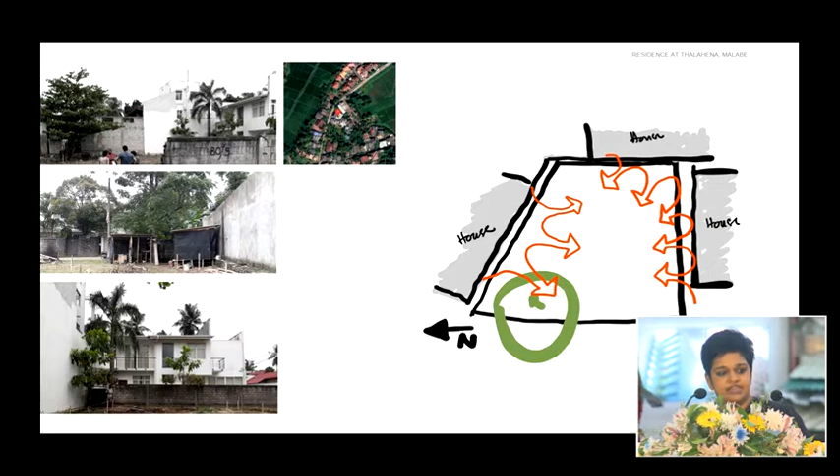This proposed home was to become the residence for a young family with working parents, and they wanted a house with a relaxing ambience. They both drive to Colombo for work from their home at Thalahena, and from the onset they both wanted an extent of privacy that would still allow them to enjoy the outdoors. And the idea of a courtyard house on this site was born.

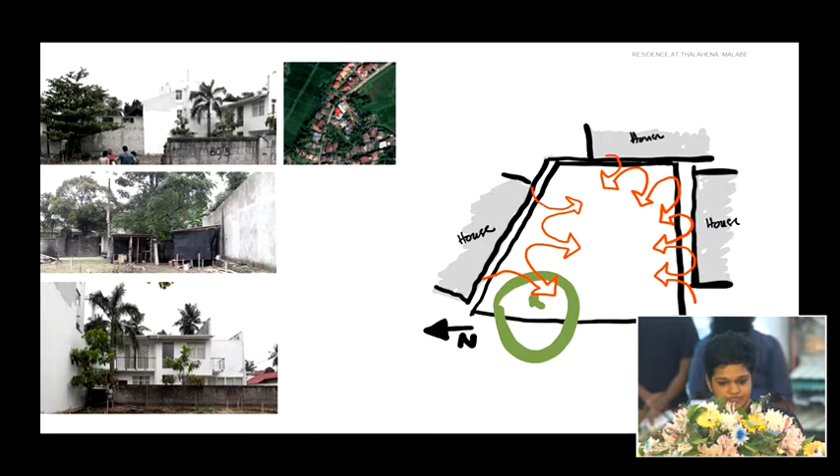So essentially the site was like this, and we placed the building without it touching the periphery. The built form is defined standalone, isolated from its boundaries, retaining an individuality. So this is about the appearance. This is how it looks.

Then we contained an outdoor space inside the built mass of the building. So this is how it works. When you place a courtyard inside and then achieve single bay spaces between outside, inside, and outside again, those spaces give access to natural ventilation and daylight. So you get to connect with the outdoors inside the home. There's a self-sustained vegetative aesthetic to look within one's own garden and up at the sky.

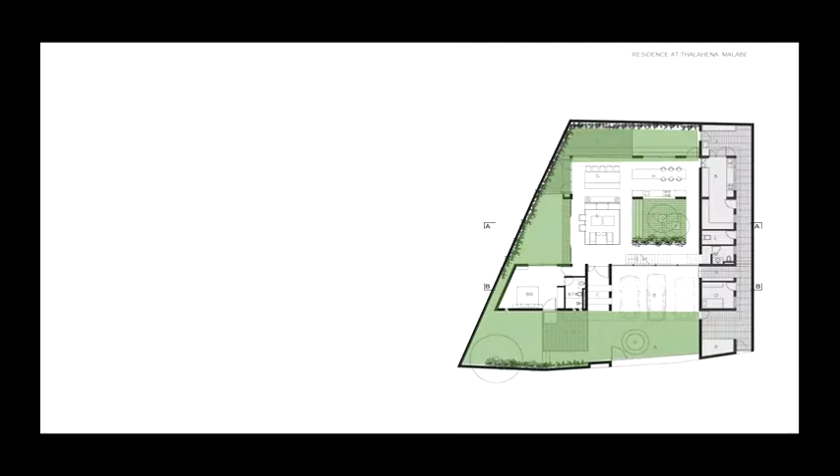So the ground floor had two zones, the living areas and the service areas. There's little penetration between the two zones. The living areas are organized around the gardens and the courtyard.

In order to make this work, we have stacked all of the services, the maids areas, the kitchens, the service entry from the road all the way to the rear yard, contained in a narrow strip so that area of the house can work and perform efficiently without affecting the rest of the house. This can also be closed off from the rest of the house so that the dog they have at home can be in this area when they have guests.

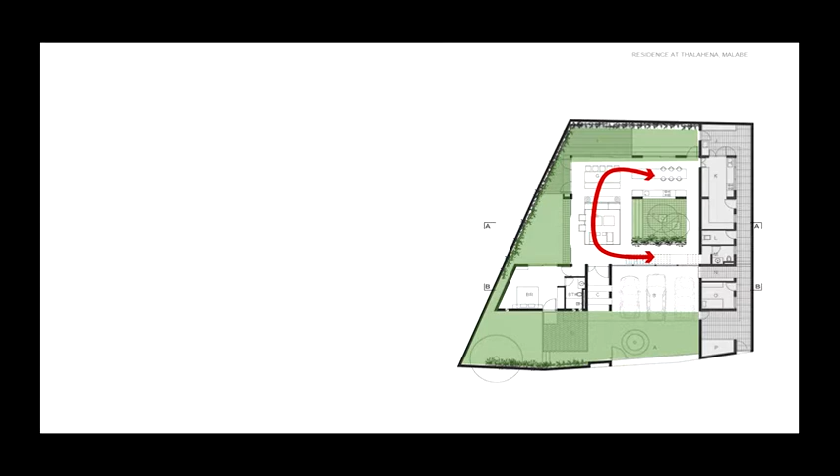So once you do that, the rest of the site is available for us to lay out the living areas of the house. The dry kitchen, the dining, the living, the parking, the guest bedroom, all of that is then open to both the courtyard and the garden on two sides.

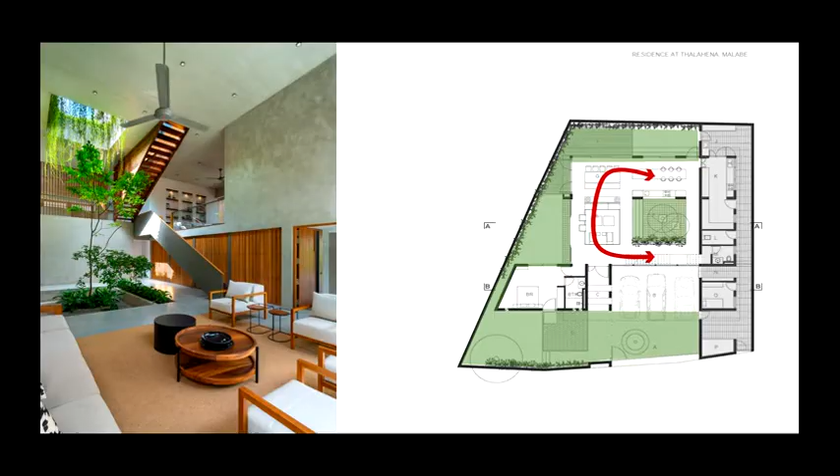So sight lines are considered important. One enters the garden and then enters the building. At the narrow entry with the low ceiling height, one is able to see the rear perimeter of the site. The total depth of the site becomes visible at the point of entry.

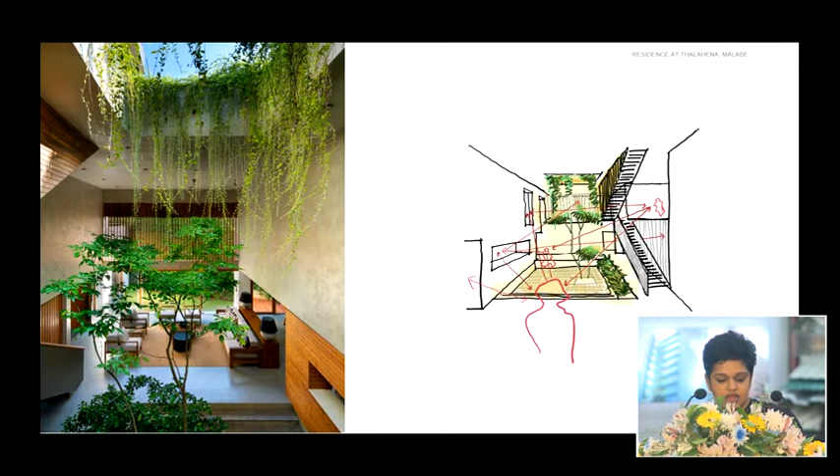So the courtyard is used to connect the spaces the family would most spend their time. Having a quick snack, watching TV, reading a book in the lounge, playing in the garden or courtyard - they are connected in a single line of sight.

So the courtyard is a multi-level asset connecting between spaces. This simple spatial formation allows for an active remake of user engagement.

So the first floor spaces are also arranged around the courtyard so that the more common activities are adjacent to the open space.

So as opposed to a conventional courtyard, we've converted the ground level circulation corridors surrounding the courtyard to vertical circulation of a staircase, engaging with the multiple levels.

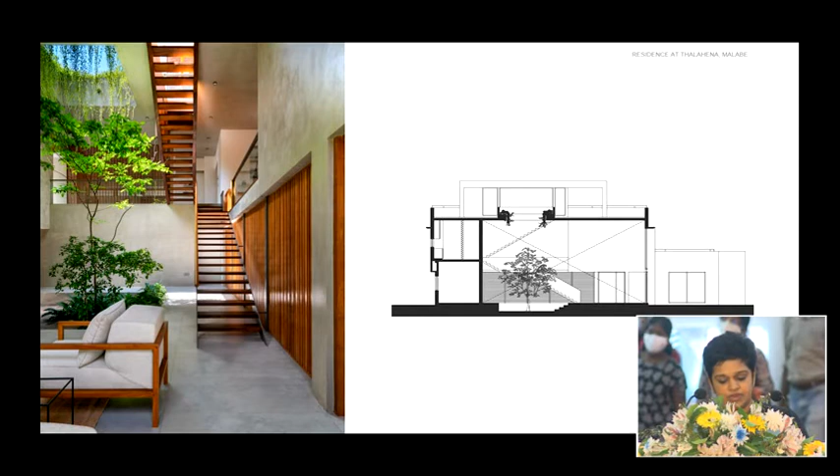So in doing so, we had to make sure that the staircase would still be able to serve its essential purpose of circulation, protecting it from the tropical rain.

So all of the spaces connect with each other and the courtyard, physically borrowing space from each other as well as visually relating them.

The seamless interaction of inside and outside enhances the environment air quality, the daylight illumination, the naturally ventilated thermal conditions, and it's a pleasing vegetative aesthetic. These factors contribute to well-being.

So this is how we achieve well-being using architecture as a tool.

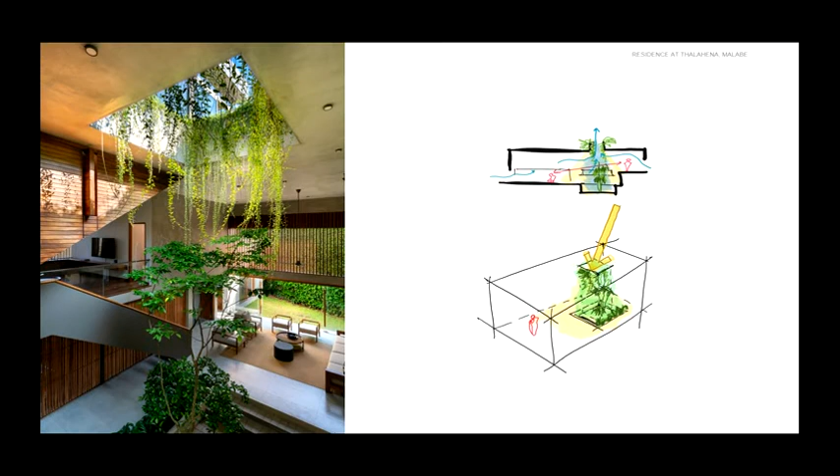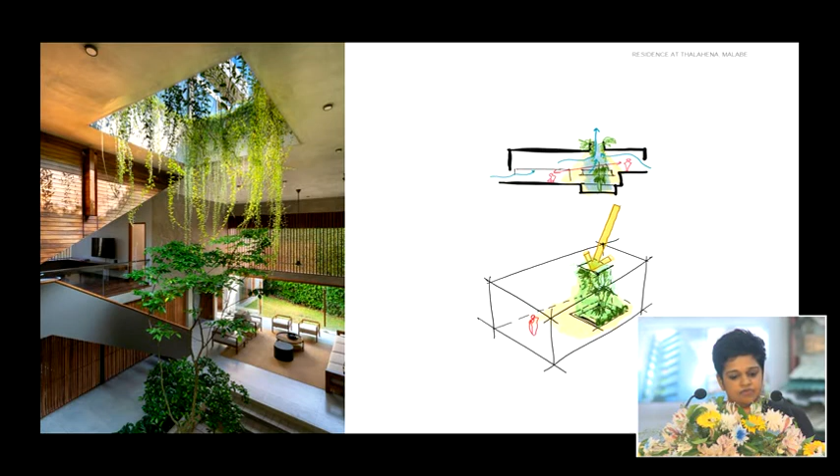So the courtyard has a small opening at the double height slab level. This opening is relatively small compared to the footprint of the courtyard. This is because we were conscious of the wet area on the ground level as opposed to the opening that was left for the plants.

So this central open-to-sky volume promotes natural stacked ventilation throughout the year. So how it works is the single bay spaces have a breeze that runs across from outside via the courtyard. So this is the stack that forms, and all of the vegetation that's in the courtyard and outside in the garden contributes to evaporative cooling of the stack cycle.

So larger volumes of common spaces in the house are naturally ventilated, minimizing the consumption of energy with passively conditioned thermal comfort.

So the structure of this house is a regular reinforced concrete column beam frame with large spans at parking and living levels. The slab soffits are designed with upstand beams, managing the levels of the roof terrace for planting and drainage, while the lower level enclosures are wall-on-wall, discreetly incorporating the structure and plumbing.